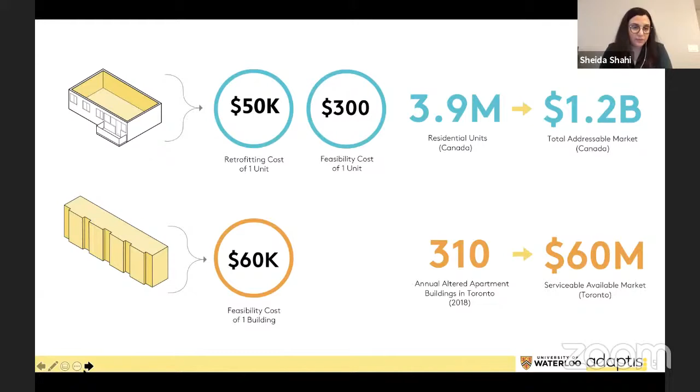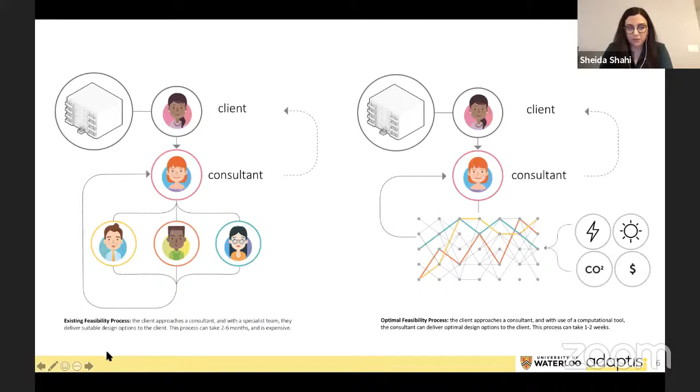Where we come in is we try to create a tool that tries to optimize and inform the client to be able to make better decisions regarding their towers. I'm going to go through one pilot application. The Ken Soble Tower is currently under construction in Hamilton. It is the first passive house retrofit tower in all of Canada. In this study, we looked at alternatives of what could have been if we took a more expansive approach.

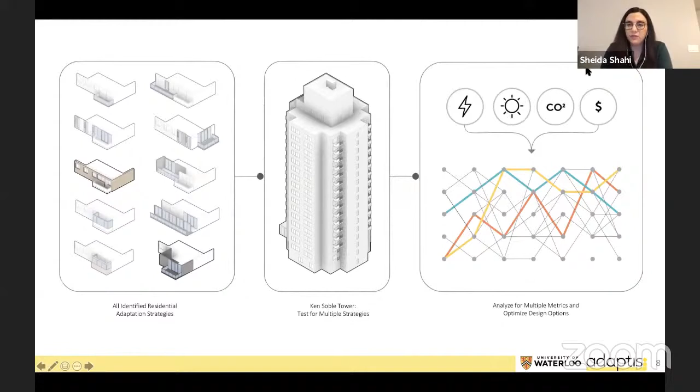So from all of the identified residential adaptation strategies, we picked out two: recladding and extending. And we tried to optimize based on energy use, daylighting, life cycle carbon emissions—so global warming potential—and life cycle costs.

As a first step, we took the existing building. We defined parameters and grids, and I'm sure we're going to hear more about it with Element 5 and how modular construction works. But defining those parameters for modular construction is extremely important, especially when you're dealing with existing buildings. We defined patterns for growth—where can this building actually grow, how does it make sense with the spatial layouts, and in what direction does it make sense to grow.

After we had the module set, the volumetric modules, then we started looking at panels. We set out multiple scenarios and picked out what panels need to go where, and we came up with a range of 25 set panels with different widths and lengths.

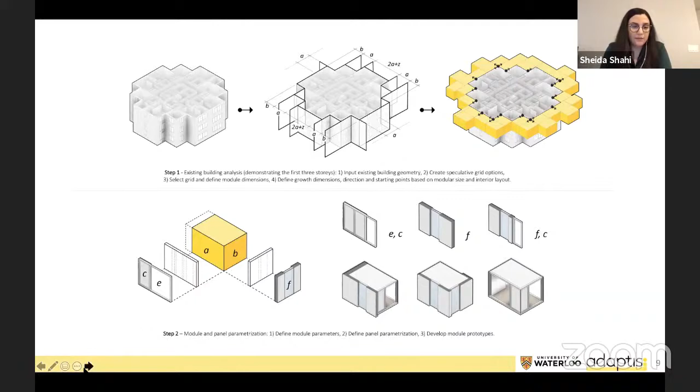In the next step, we started looking at possibilities of separate unit growth. So with one extension, you're going to have a larger unit, but then when you start to grow large enough, you could divide up the units and generate extra revenue. I'll get into that later.

In the next step, as the algorithm starts to generate design options, then we start parsing through those and eliminate the ones that do not meet our guidelines for design.

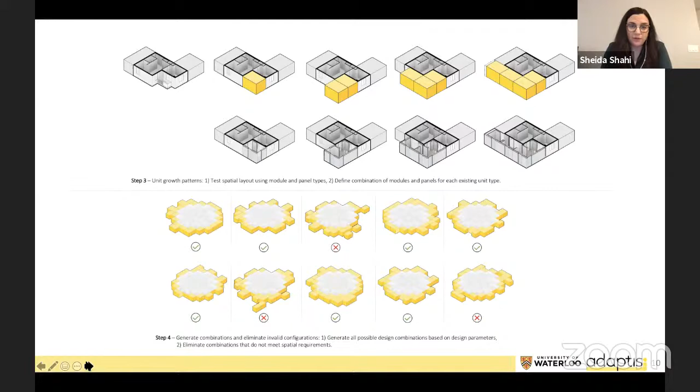An example of what that looks like: with a simple extension, you're increasing the unit, which is great in a lot of cases. The clients that we've talked to, there are examples where a family of 10 is living in a 2-bedroom unit. So from a social sustainability point of view, it's very important to be able to extend some of those units. But it's also important for these buildings to start generating extra revenue so they can have sustainable paybacks. So keeping the same unit but extending to it is the ultimate goal.

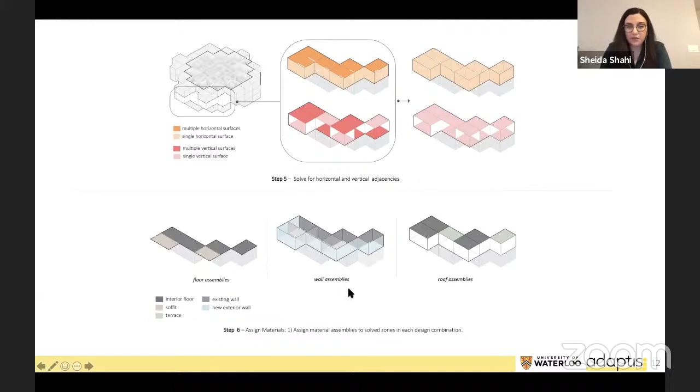The next step, after generating the design options, we solved for adjacencies and were able to assign materials—floor assemblies, wall assemblies, and roof assemblies—so that we could calculate the energy use and daylighting for each of those permutations. The life cycle analysis and life cycle costing is also based on those material calculations.

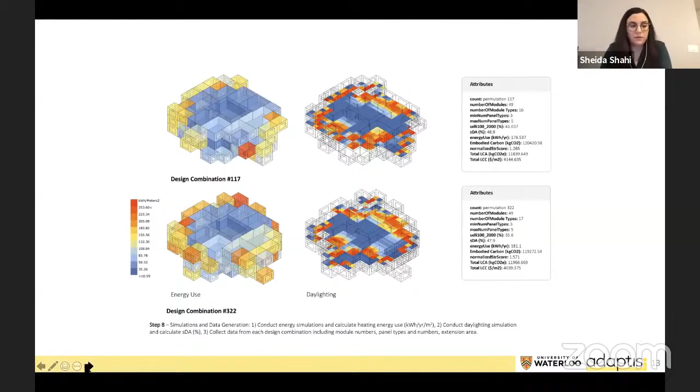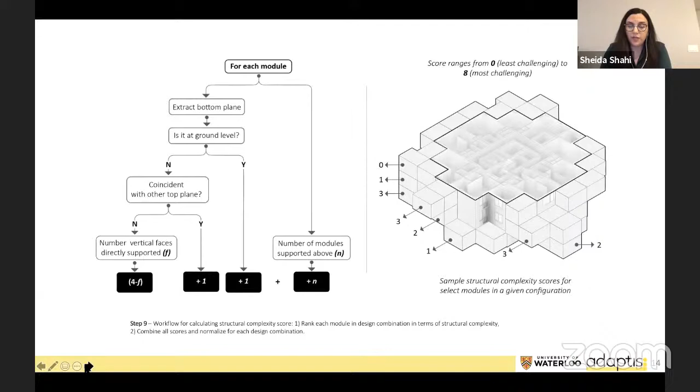We also took into account the structural complexity of these modules. We defined a workflow—a lot of this work was developed by my colleague at Waterloo, Chris Rausch—and so we were able to give a score to each of these modules and then factor that into our lifecycle costing and performance.

So we ran the model for 2 weeks. We ended up with 600 permutations. Each took about half an hour. And right now here you could see the range of number of module extensions, daylighting, energy use, embodied carbon, and so on.

From this interactive tool, we could start to filter out our limitations. For example, 40% and up is the acceptable daylighting range, and so on. From this graph on the right, we're showing life cycle analysis, so global warming potential and life cycle costing. I'm just showing a chunk of this data to show you that within the same energy use and for the same amount of global warming potential, we could have a range of different design options that vary by cost. So that can start to help a lot of clients gain perspective of what they can do with their money.

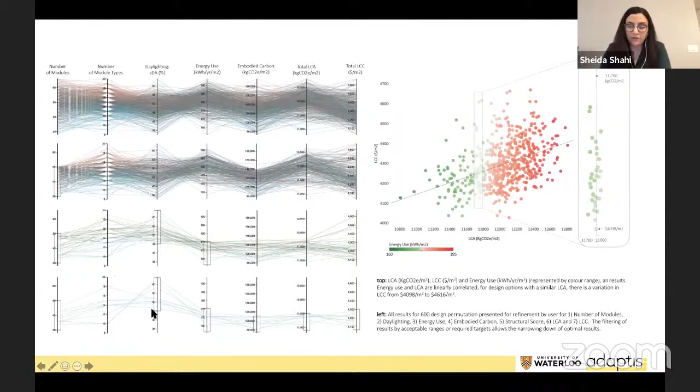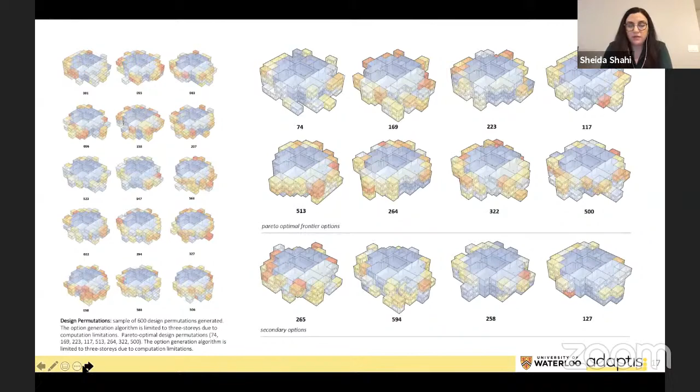And then the last step, when we map lifecycle costing versus structural complexity score, which is a proxy for the design complexity, we could start to pick out the pareto-optimal design solutions that look something like this. So the frontiers are here as an example, and the secondary options are here. This is what our results ended up looking like, 600 of these.

Jumping into the future work, we're working towards developing an interface that can streamline the whole process and make this tool easier to use. Right now, it's a whole bunch of different components. And the last thing that needs to be added to all of this is a financial analysis.

As an example, what I spoke about earlier, developing new units, extra units, and that revenue can help pay back for this project. In this example, we were able to generate 45 new units, 2 extra unit types, so right now there's a total of 4, with an 8-year payback and an internal rate of return of 8%, which is pretty good.

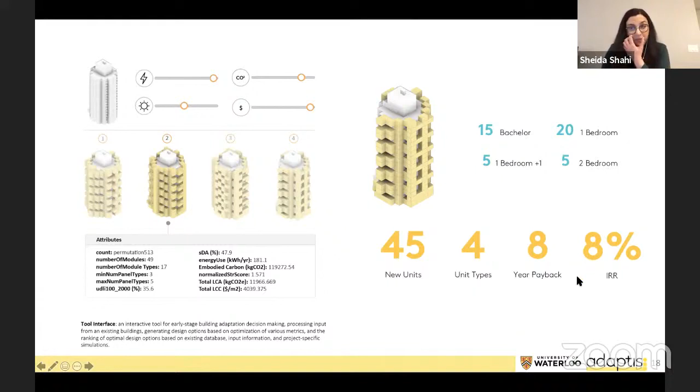So in the next 6 months, we're looking for more pilot projects, either new buildings or additions, adaptations like I showed you here. And hopefully in the next 2 years, when we have enough data, we could start to develop predictive models that can even make this process faster.